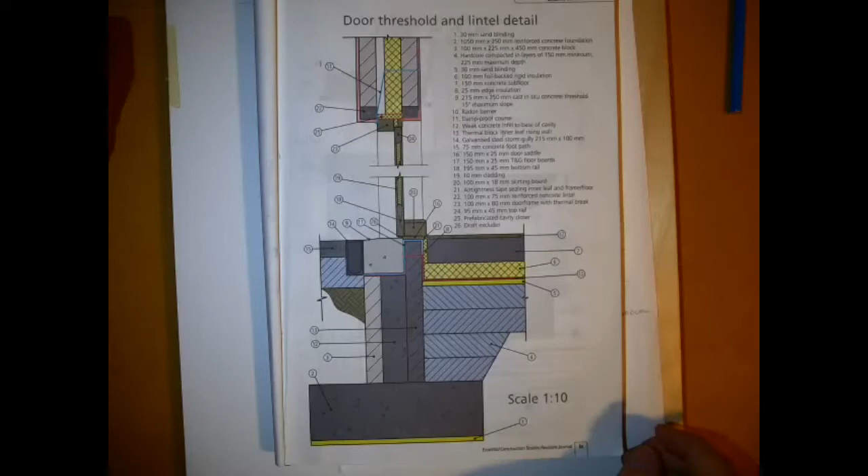In this video we're going to take a look at the threshold detail. So to start off with, we'll take a look at what's in the workbook, and we can see here that we have the top of our hardcore and our ground line would be kind of matching up, and up here we have the details around where the door meets with the inside floor.

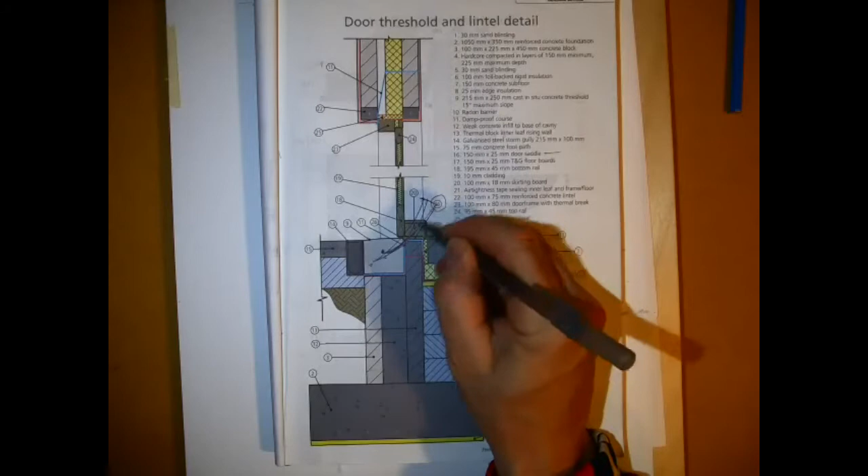So a large piece of concrete here, and we can see that there's concrete coming right up into that there. So really and truly that's a cold bridge, and there'll be a very high risk of condensation. Even though there's a thermal break shown on the inside here, that's coming to the inside of the building, and definitely not a good detail that's shown there. So I've sketched up an alternative to this here.

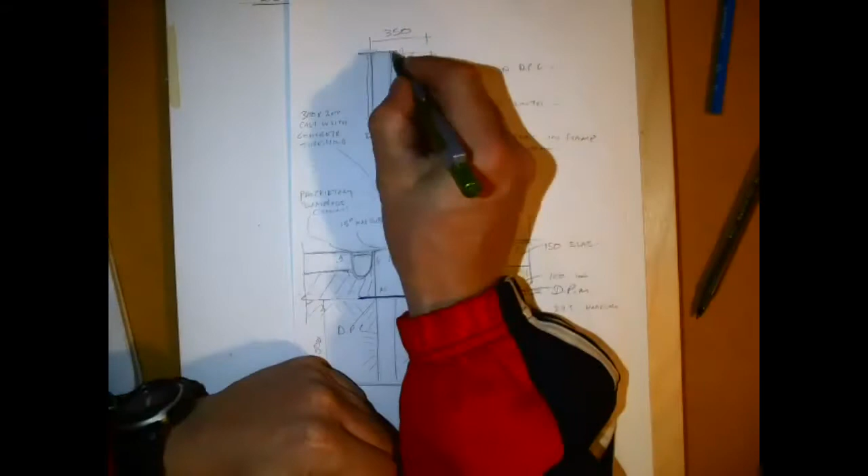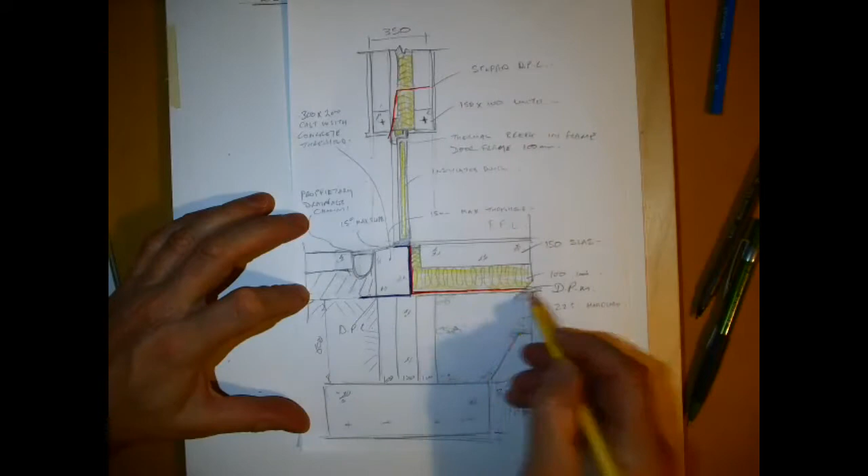Again, our usual stuff, our 350 wall and our foundation, 3 times the width of this here. So we know how to draw all these things at this stage, and the usual kind of things here in line, 100mm blocks. And you can see here where I have the line shown across where the top of our DPM is, our radon barrier, and top of the sand blind is kind of in line with the bottom of that in situ concrete piece at the door threshold.

In this detail, you can see we have the blue DPC around the in situ concrete, and there's a drainage channel outside of that. There will be hardcore placed underneath that concrete as well. It will be compacted, and we have an insulated door, a thermal break in the top of the frame, and we have a lintel up here.

This lintel would change in size depending on what's above it. So the smallest lintel would be maybe a 100 by 75, more likely to be 100 by 100. And then if it was carrying a bit more weight, it would be 150 by 100.

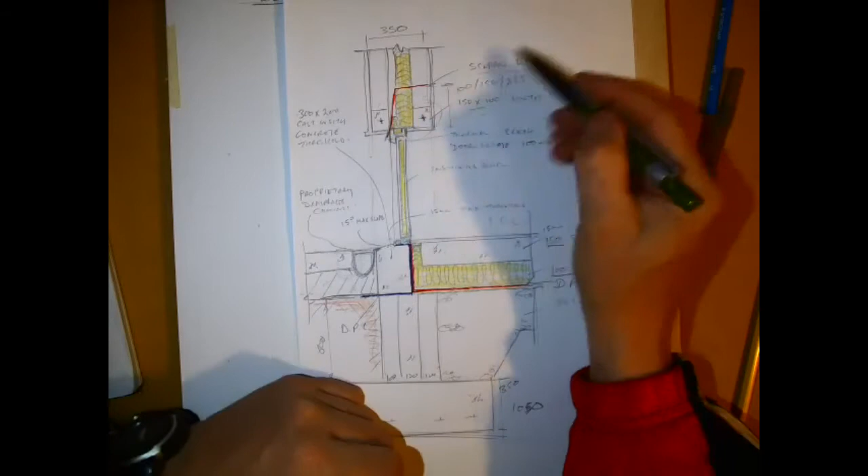And the DPC, the red line that you see here, would be left hanging down onto the door, would be fitted, and then the insulation would be pushed up to meet that. And there's a small piece squeezed in at the edge of that, and the DPC would normally be about 600mm, and it can be trimmed off where the reveal is out here at the end, and that lets us into the start of this here.

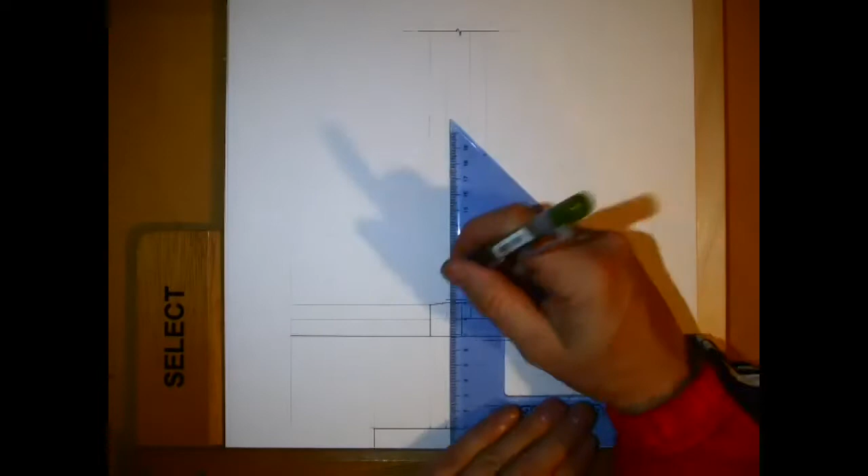So we start by drawing our foundation and setting out the wall on it. Project all your lines up, and as usual we'll go for something like 600 up to the ground line, and our sand blinding, and we can put where the DPM is going to go, and 100mm insulation, and the 100mm slab. Well, you could increase that to 150, but that gives us the top of where the in situ concrete threshold is, and I'm just colouring in the small threshold that's at the bottom of the door.

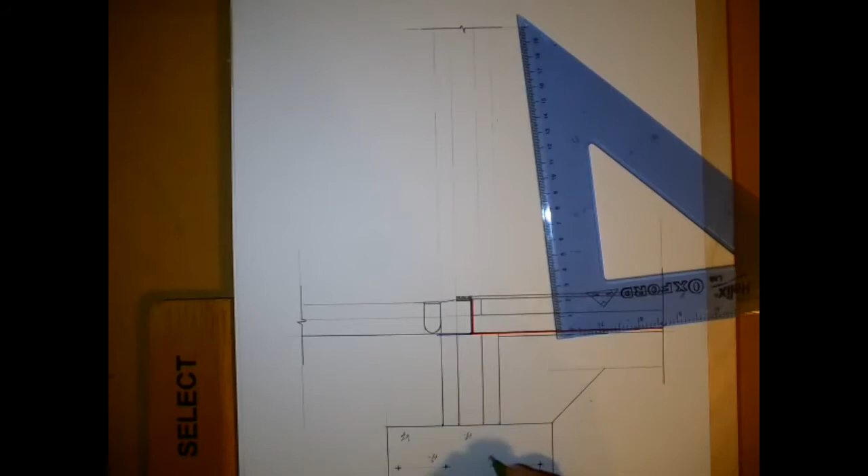It can't be more than 15mm, and the maximum slope at the top of the in situ concrete cannot exceed 15 degrees. So it means that if water comes up towards the threshold, it's not level, it's running away into the proprietary drainage channel.

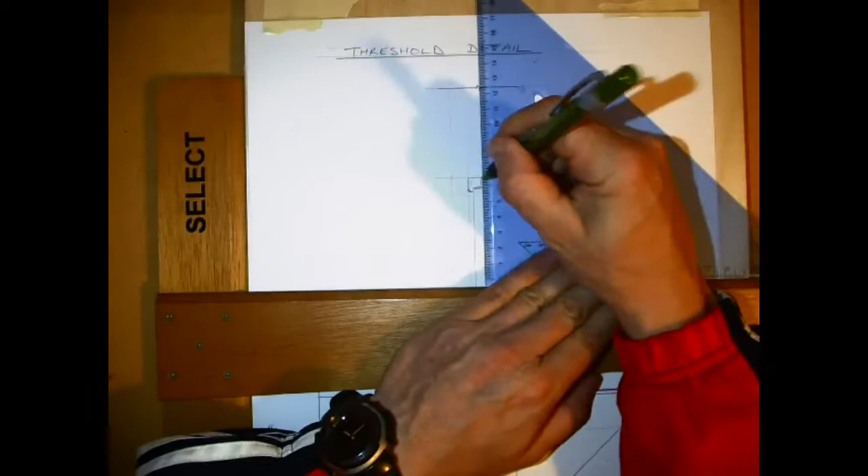I'm putting in the detail from all my bits of concrete, and I'm drawing in the detail of the door frame here. The door frame has to come in line with the internal side of the external block, so it cannot go past that. And obviously there's a DPC that runs right up along the edge and along the top as well, which is a stepped DPC.

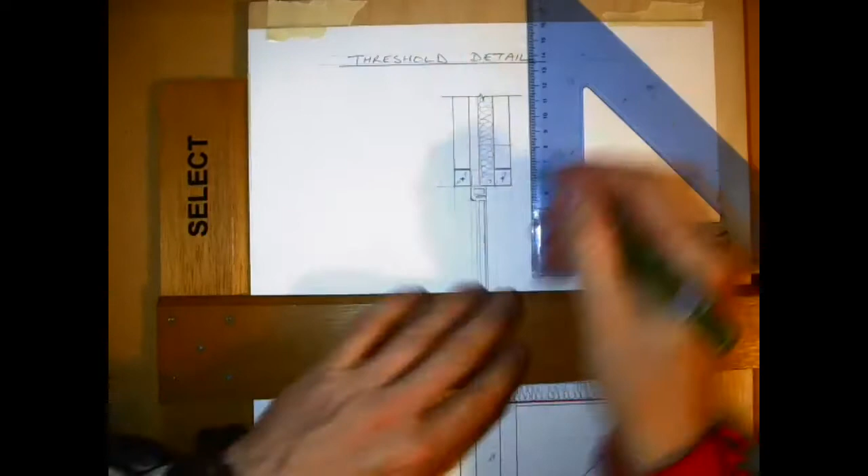So sticking in the usual details for the insulation, and we want to take a look at where our stepped DPC would be going. So the red line shown there would probably be placed on a soap bar, placed across the top of the lintel. And like I said, it's fitted afterwards. The DPC is fitted while it's being built, and then the insulation is pushed up before the door frame is fitted. It will be hanging loose. Most likely best to push a bit of insulation in it to keep it from getting damaged.

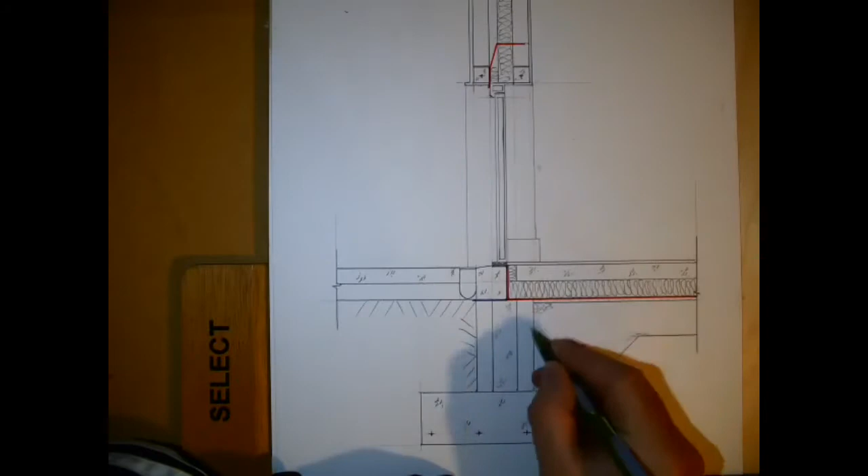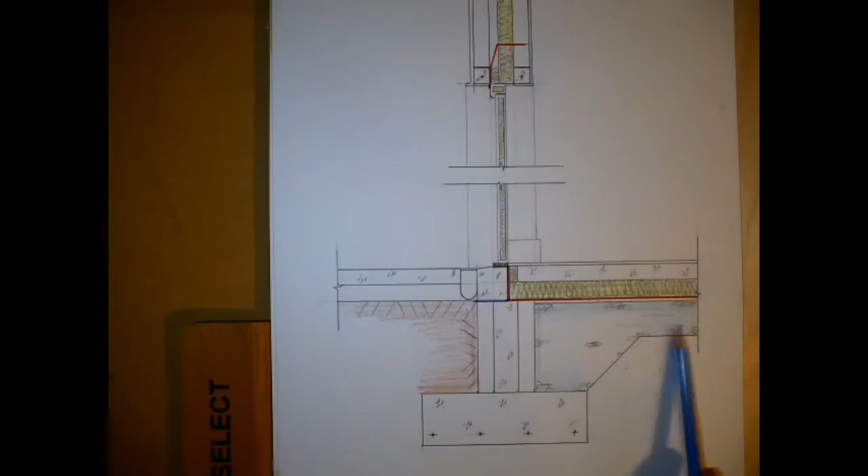And usual details, hardcore here. And outside of that, a few details we haven't come across before: putting in a door, basically a rectangle with a rectangle inside of it, colouring in yellow where the thermal break would be. There would be insulation in that. You could have a number of variations, where you would have plywood panels covered in PVC and insulation sandwiched between those. So it's quite easy for us to get away with drawing that as long as we label it.

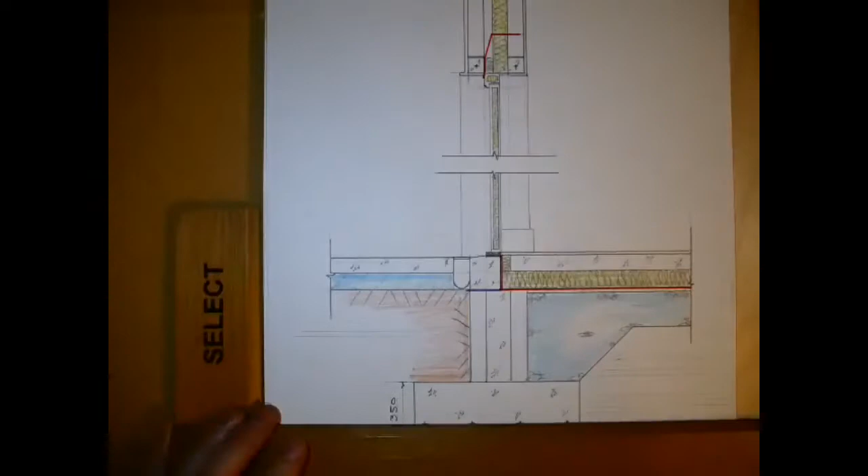And showing our hardcore here, which will be compacted. These sizes could be increased depending on what sort of weights are above that. Put in all your guidelines for your details. Put in plenty of them. They're easily rubbed out when they're drawn light, and just start working your way around all your different details. You can see I've pulled out my sketch to make sure that I'm putting everything into this. Some of the usual details.

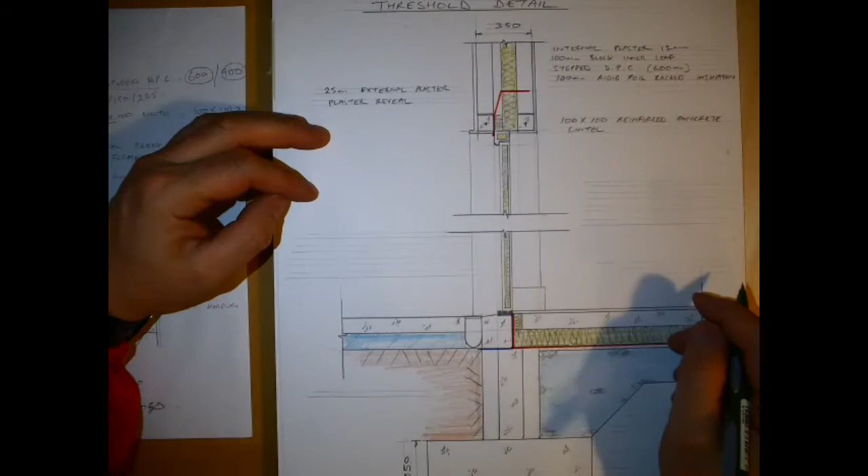The only thing now that maybe I haven't highlighted would be where there might be air tightness tape. So obviously with a door frame going into an opening, around that whole opening there would have to be air tightness tape. So a simple broken line can be used to show where air tightness tape would be.

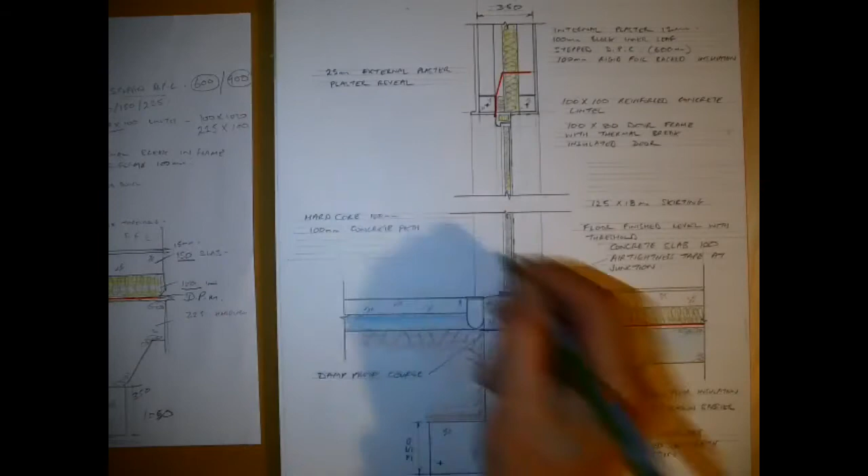Some people will say where the door threshold meets the internal floor, there might be a channel here, or a transition plate. Depends on what the floor is finished on. It really isn't necessary for a door saddle. A floor finish can be finished right up to the same height as the threshold, so it'll be level with it, but not exceeding the 15mm when you meet it from the outside. And I have my broken green line in with pen for the air tightness tape.

And I think that's pretty close to all the details there. You can pause this when it's finished and take a look to see that you have all the details in this. There could be alternative arrangements for drawing the way it's met at the threshold. That's what I've come up with.